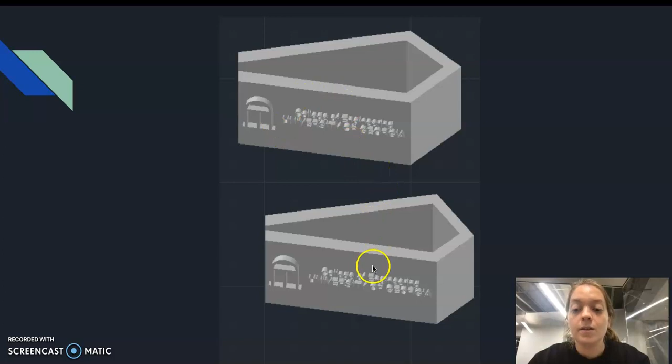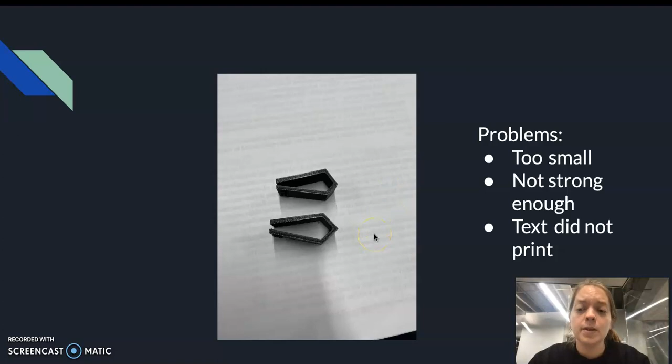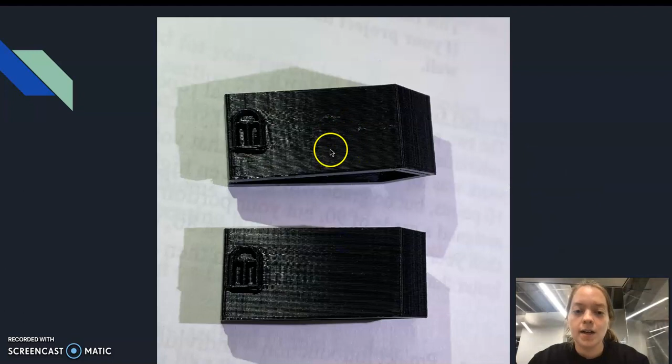This is how it printed. The top part worked out okay, but there were problems. It was too small, and not strong enough, so the gap at the bottom was too big and the money didn't stay in the clip. Also the text did not print. This is the side view. The only thing that printed was the arch, because the text was way too small and it essentially came off when we took it out of the printer.

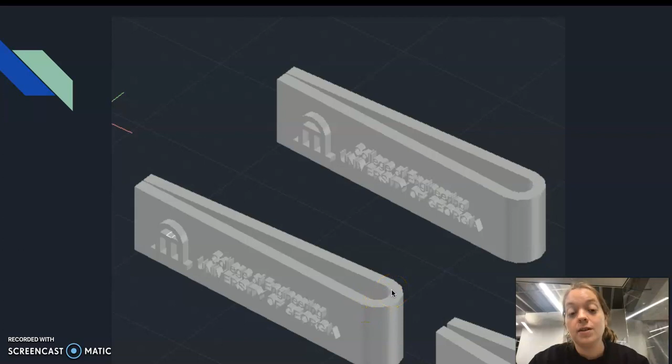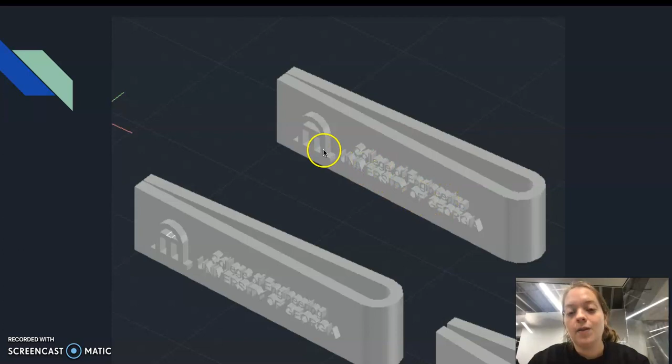So our second attempt was a different design. We decided the triangular edge method just didn't work because it left way too much space for the money to move around, so it wasn't efficient. We changed it to a curve and changed the size, making it longer: instead of 1.5 inches, we made it 3 inches. For our two designs, one had a 1/4 inch radius diameter, and the other had a 1/2 inch diameter. Because of this, we were able to make the College of Engineering logo and arch a lot bigger, hopefully letting it print better.

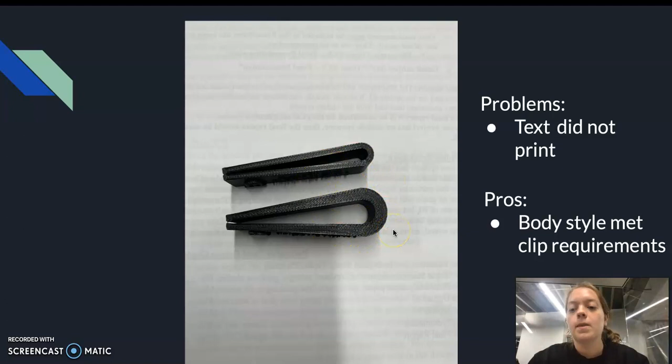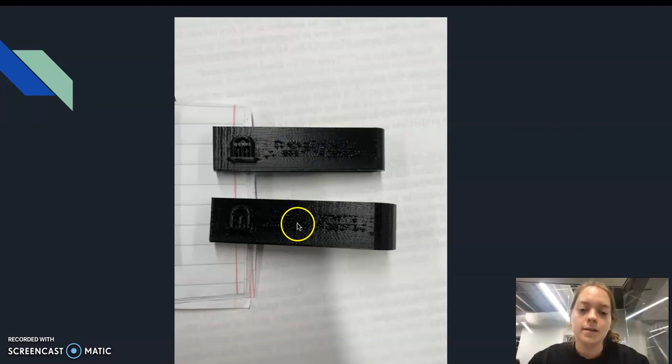This is the end product, the bigger clip and the smaller clip. But there were problems with this design too—the text still did not print properly. This is the text here; it looks like Braille, it didn't print well at all. But the pros were that we really liked the design. It held the money really well, and it met the amount of money well too—the clip meant to hold 20 bills held it really well, and the one meant to hold 5 also met that requirement.

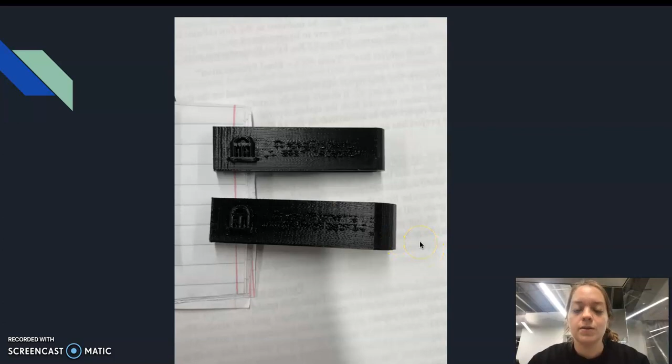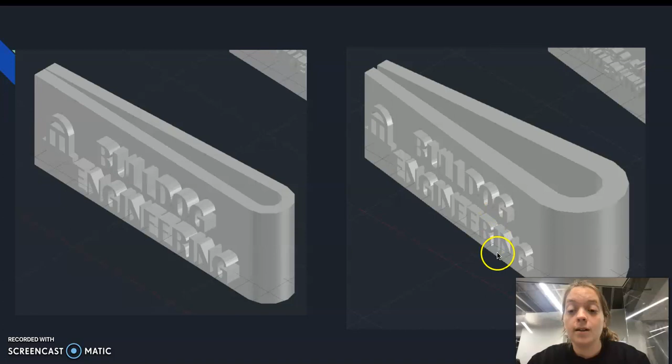So we decided to stick with the design, but had to come up with a different solution. For attempt 3, we decided to come up with a different logo because the College of Engineering logo just didn't work out—it was too long, and our money clip was already as long as it could be to still fit money in it. So we used the Bulldog Engineering logo instead and kept the arch, so we could make the font a lot bigger and taller, using more surface area of the money clip, hoping that would work. We also kept the original sizes.

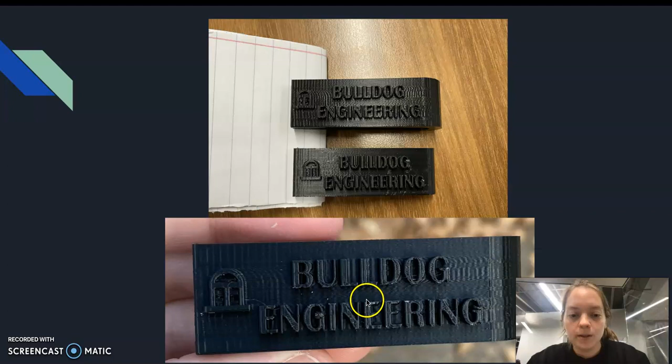So we tried printing this, and it actually worked out really well. This is the side view with the Bulldog Engineering logo on it, and both sizes pulled up and worked out well. This is the top view, and you can see it actually holding money—5 bills stacked up, and 20 bills—and it met its requirement and worked well.

So for us, we learned a lot from this project. Mainly we had to learn how to use the 3D printer, which was a huge learning curve. We had to learn how to upload the files into Cura, and that we had to save the files as an STL file from CAD. We had to learn all the commands for CAD to get the file into the right order, and we had to learn what the 3D printer would and wouldn't do.

Probably our biggest lesson was about the 3D printer we used, the Dremel 3D45—it doesn't like small fonts. So if you want to print something very specific that's on its side, the way we printed it, you have to make it pretty big and pretty thick. If not, it's not going to work.

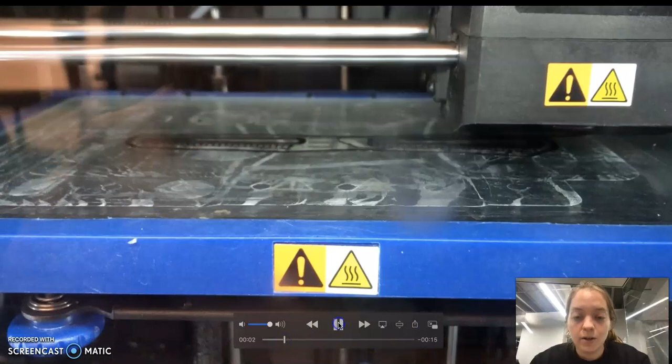We also included a video to show you guys, of our 3D printer actually going. You can see here the two money clips being printed, and it took about 3.5 hours for our money clip to print.

So it took a while, but it worked out well, and I think our project was a success overall. But thank you guys, thanks for looking at our project, and have a good one.